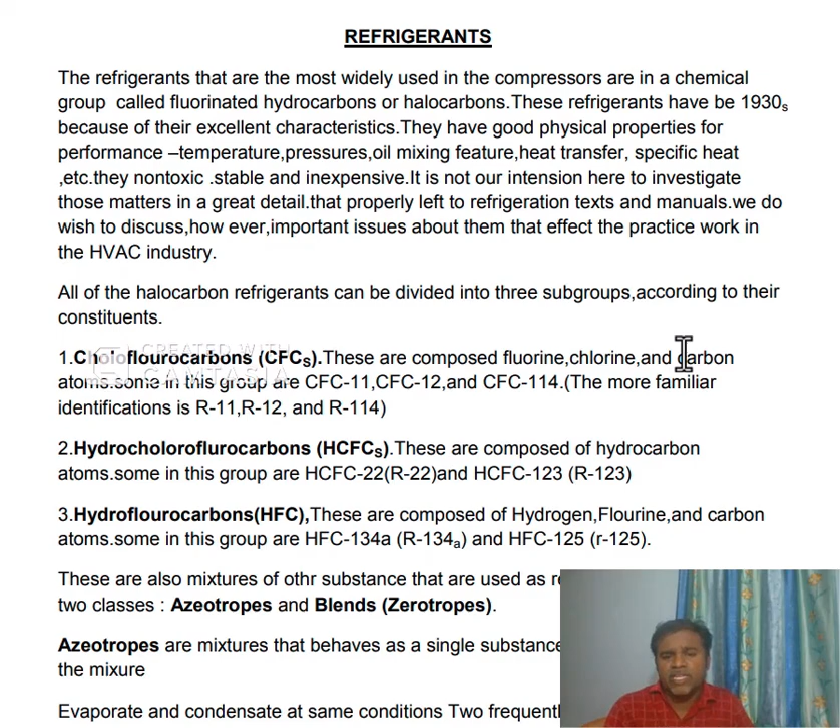R12 was previously used in the refrigeration industry, including mobility and the railway industry, but nowadays, due to its ozone depletion potential and the damage it causes to the ozone layer, it has been phased out and replaced with other refrigerants. I am going to explain in detail what has replaced R12. Coming to the next category,

hydrochlorofluorocarbons, these are HCFCs. These are composed of hydrogen atoms as well as chlorine, fluorine and carbon. In this category you can see HCFC 22, which is R22, and HCFC 123, which is R123.

Coming to the third category, HFCs, these are also composed of hydrogen, fluorine, and carbon atoms. In this one you can see HFC 134A, which can be represented as R134A, as well as HFC 125 or R125. R is nothing but the refrigerant name convention.

There are also other mixtures, which we can divide into two categories: azeotropes and blends, or zeotropes. The blends can also be renamed zeotropes. So what are azeotropes and blends?

Azeotropes are mixtures of refrigerants that behave as a single substance in all conditions. They try to mix as a single entity and behave as a single entity. For example, evaporation and condensation happen at the same conditions. In this category you can see R500, CFCs and HCFCs.

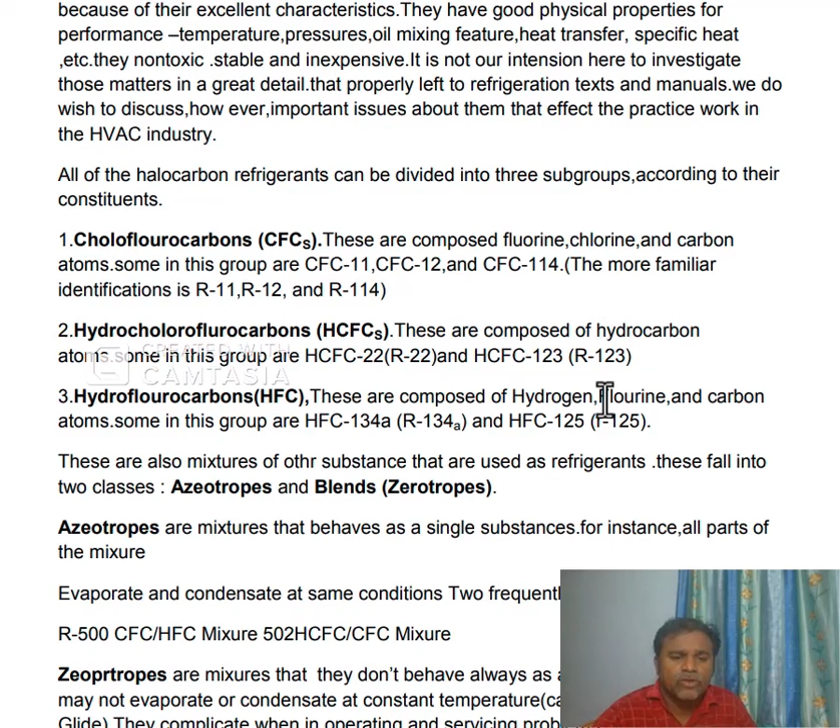Coming to zeotropes, these are mixtures that don't behave as a single substance. They may not evaporate or condense at a constant temperature, so their operating pressures and temperatures are a little complicated and related to some service problems. I think you understood about azeotropes and blends. Blends are nothing but zeotropes. Azeotropes behave as a single substance, and zeotropes behave as a different substance.

So coming to the properties of a good refrigerant. What are the properties needed for a good refrigerant to be selected, and put into an air conditioning machine, so that our efficiency will be good. Let me show you all the things, you can have a look.

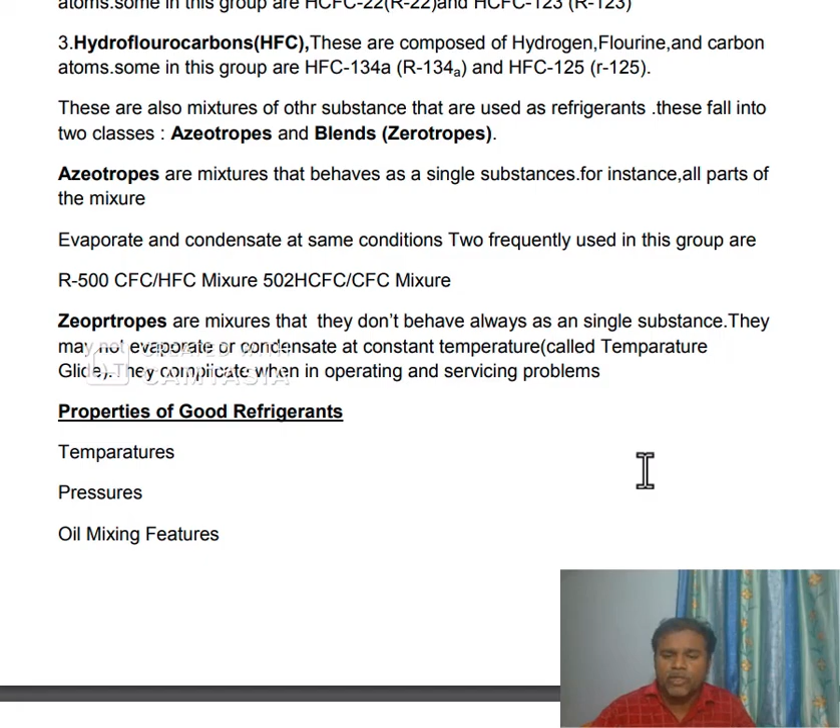Good properties of a refrigerant include temperature properties, pressure, and oil mixing - the mixing of gas and oil. It should behave as a single one, not separately, because due to high pressure and temperature, if the oil is separate, the mixing probabilities are not there. If they don't mix in a single manner, the gas pressure will rise separately and the oil will sit as a sludge, which is not a good sign for the refrigerant.

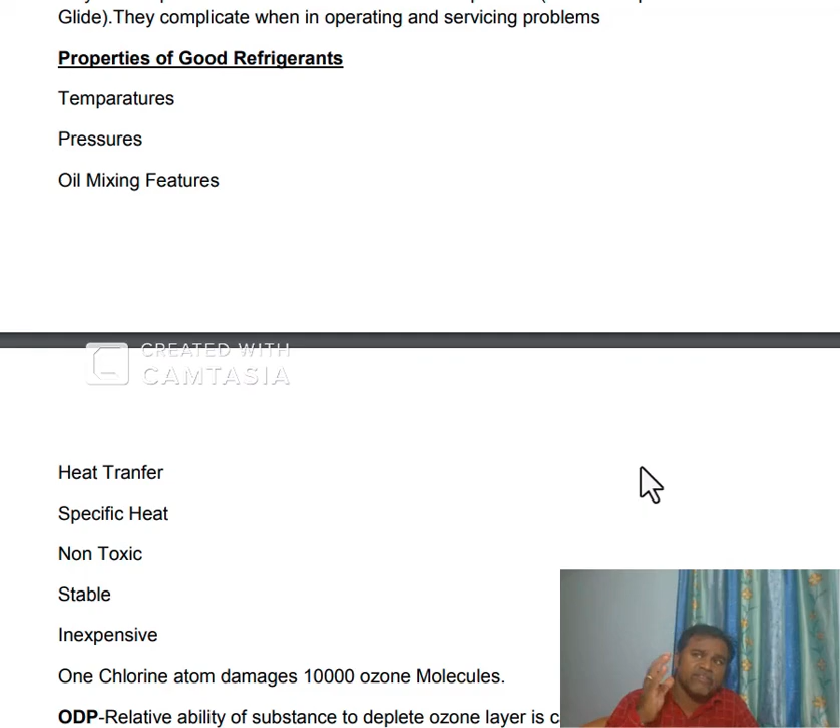Other properties include heat transfer possibility, specific heat, and it should be non-toxic, meaning it should not be poisonous whenever it is leaked inside a space where people are living. It should not damage the conditions. It should be stable and inexpensive, it should not cost much.

There is one point missing which I need to say, that is global warming potential, GWP. This is also one of the important properties a refrigerant should have. I will be coming to GWP further and explaining that. Generally, it should have a low global warming potential.

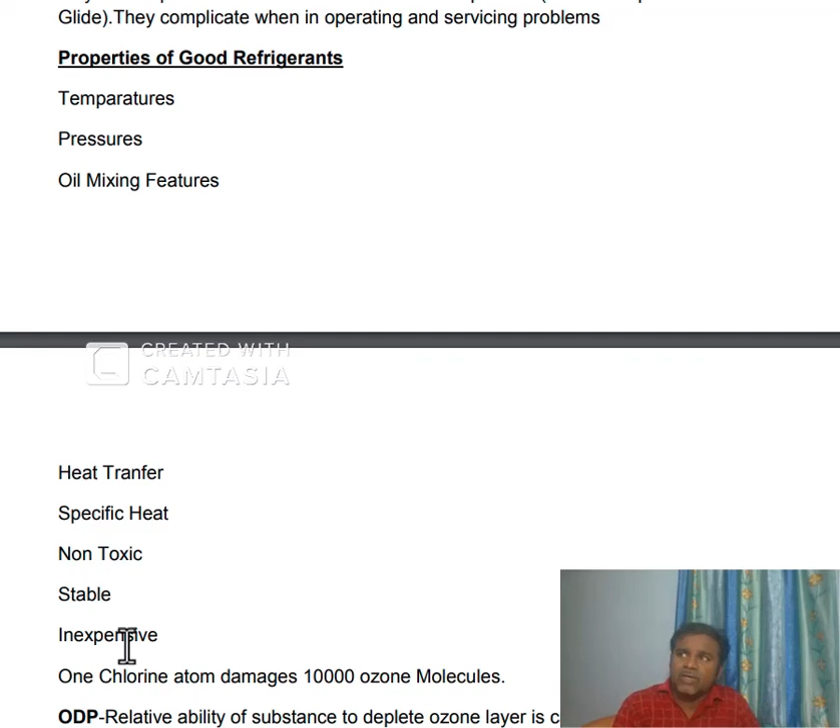Coming further, I want to explain how it basically damages the ozone layer. One chlorine atom is going to damage 10,000 ozone molecules - this is the potential damage factor a chlorine atom has. So scientists did a lot of research and found ways to phase out this chlorine atom, so some refrigerants came about by phasing out chlorine as an atom.

These were mainly developed to protect the ozone layer, which was already getting damaged. So there comes a concept called ozone depletion potential, ODP. Generally, if ozone depletion potential is 1, it is going to damage the ozone layer perfectly, because it consists of a chlorine atom. Coming to CFC 11, it's already 1, and CFC 12 is also having 1. That's why railway industry was earlier using CFC 12, which was phased out because of the norms, and now they are using R32 kind of refrigerants.

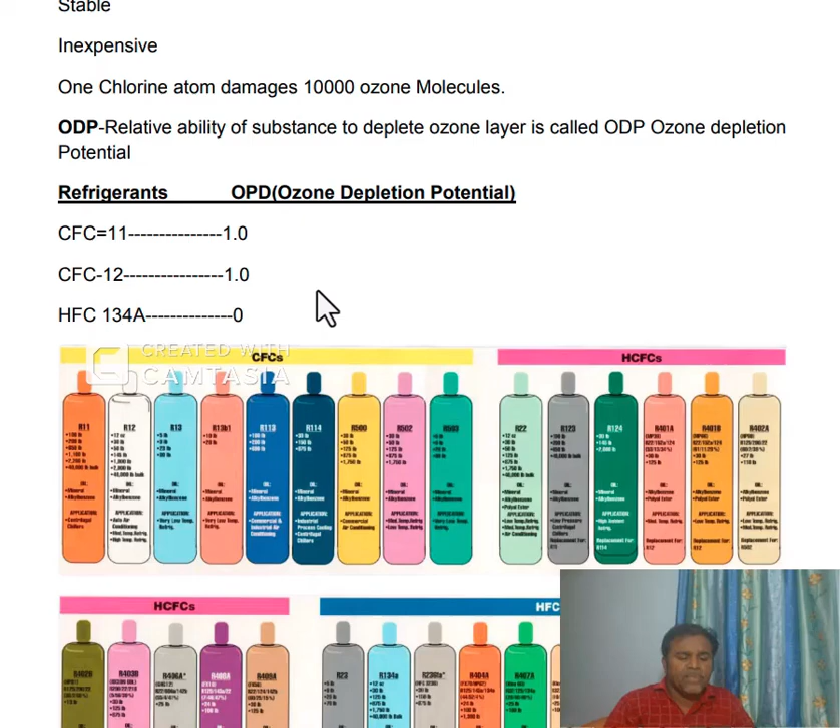So HFCs, you can see R134A is having 0. It represents a 0 ozone depletion potential, meaning it is not going to harm the environment or the ozone layer further.

These are the different representations of colors of the gases. Each color of gas has a different representation. You can see here R11, R12, R13, R13B1, R113, R114, R500 and R22 - so many gases are there. You can see these are the types of colors. CFCs are represented in this area - you can see what is present under CFCs and what is present under HCFCs. HCFCs are given here, and only HFCs are present here.

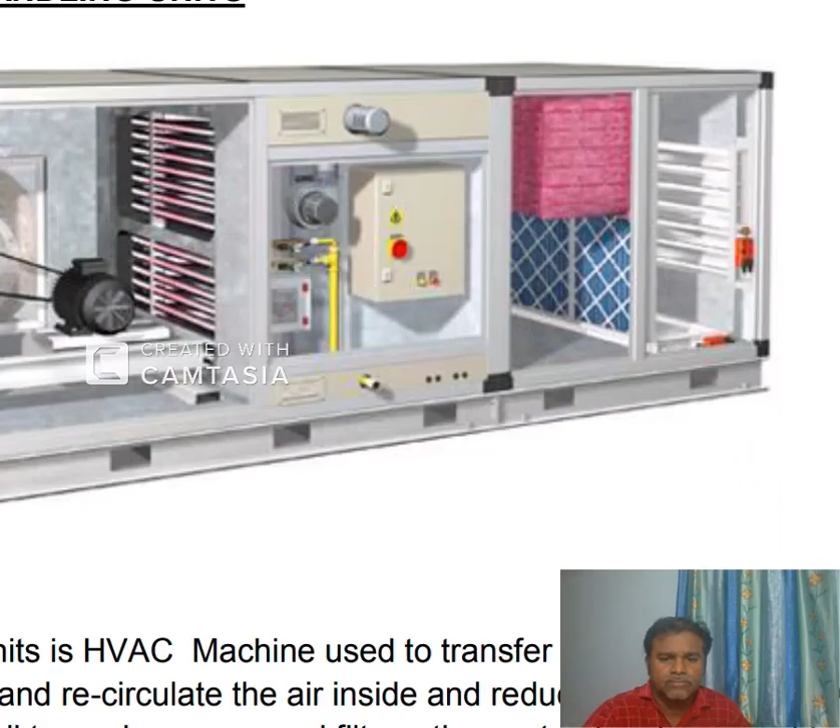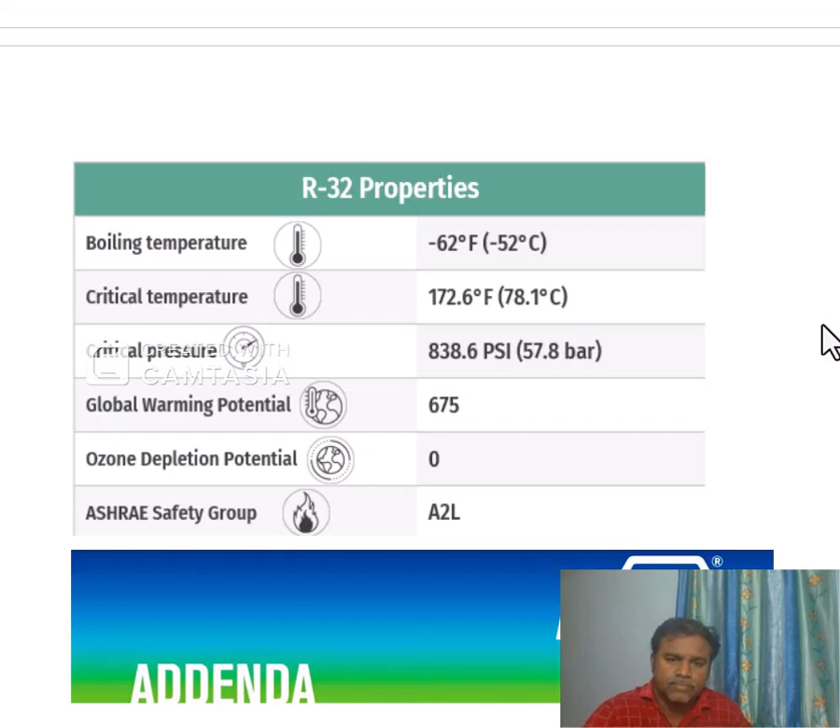Before that, I want to explain what global warming potential is. It is the index to measure how much thermal radiation the greenhouse gases would capture or absorb over a time frame. The capacity of the greenhouse gases to absorb heat - that is called global warming potential.

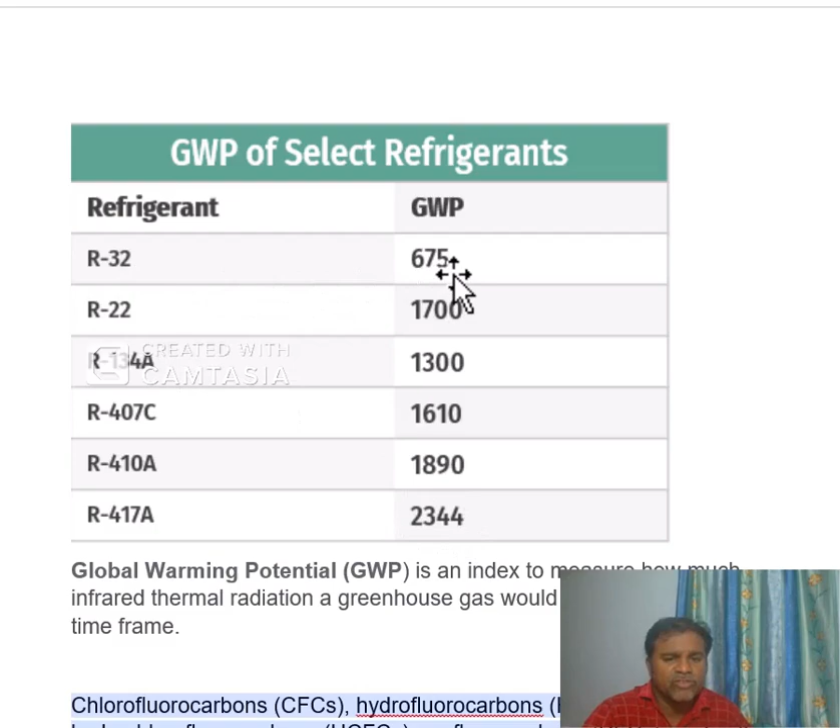Coming to refrigerants, R32 has a global warming potential of 675, R22 has 1700, R134A has 1300, R407 has 1610, R410 has 1890, and R417 has 2340. You can see R417A has a high global warming potential. This refrigerant is not suitable, as it is going to absorb most of the heat compared to R32, which has a lower global warming potential - you need to understand this.

Here you can see the chlorofluorocarbons (CFCs), hydrofluorocarbons (HFCs), hydrochlorofluorocarbons (HCFCs), as well as perfluorocarbons (PFCs), and sulfur hexafluoride (SF6). These are sometimes having high GWP gases, meaning for a given amount of mass, how much heat they are going to trap, more than CO2. So these are having high GWP values.

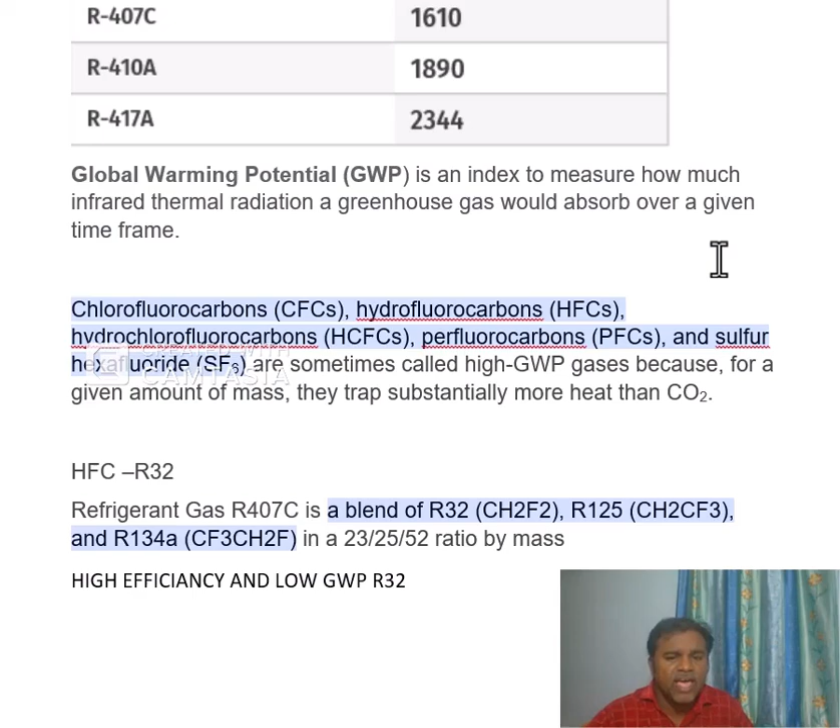Coming to HFC 32, it is a good refrigerant. As I said, it is having low GWP and it's also having high efficiency. High efficiency means it's having a high heat capturing rate from the indoor space, the absorption.

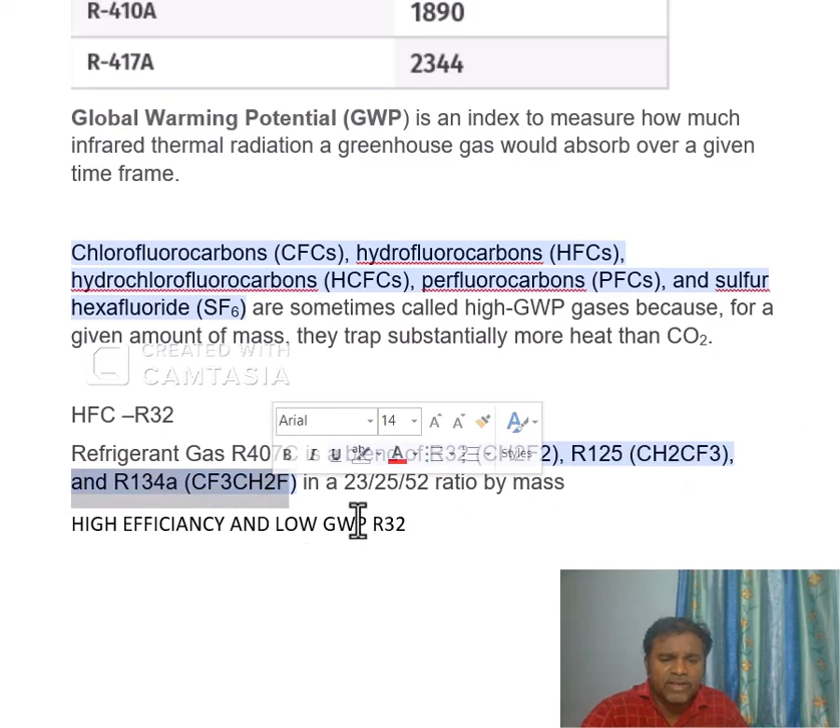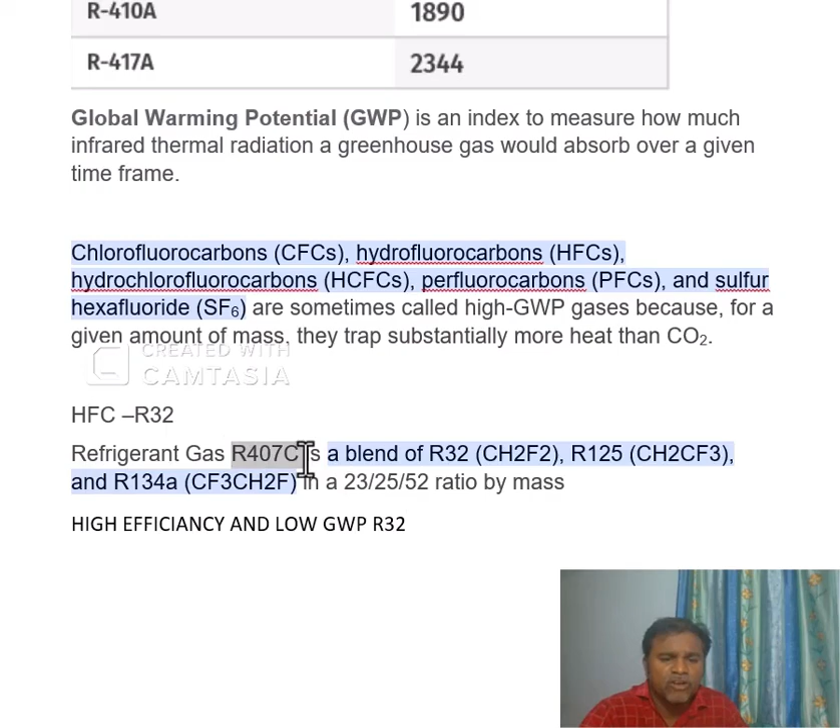Coming to the refrigerant R407C, it is a blend. It's a blend of R32, R125, and R134A refrigerants in the portions of 23%, 25%, and 52% respectively. So R32 is 23%, R125 is 25%, and R134A is 52%. This particular R407 is called a blend, so try to understand what blends are.

Generally R32, or not only R32, every refrigerant has these parameters: the boiling temperature, at what temperature this refrigerant is going to boil, critical temperature, critical pressure, global warming potential, and ozone depletion potential. Here ozone depletion potential is 0, and GWP is 675. Critical pressure and critical temperature are given already, along with the ASHRAE safety group.

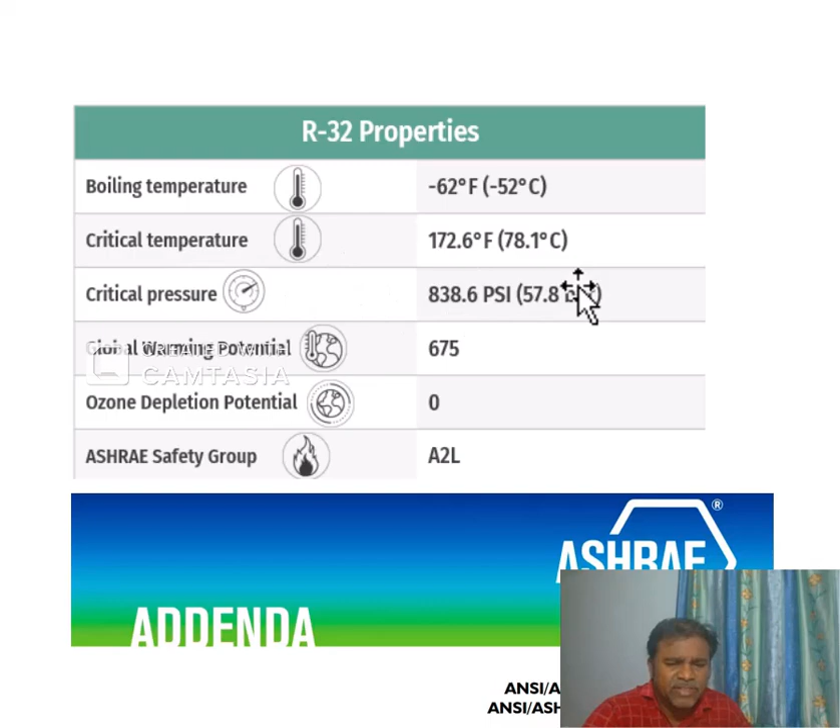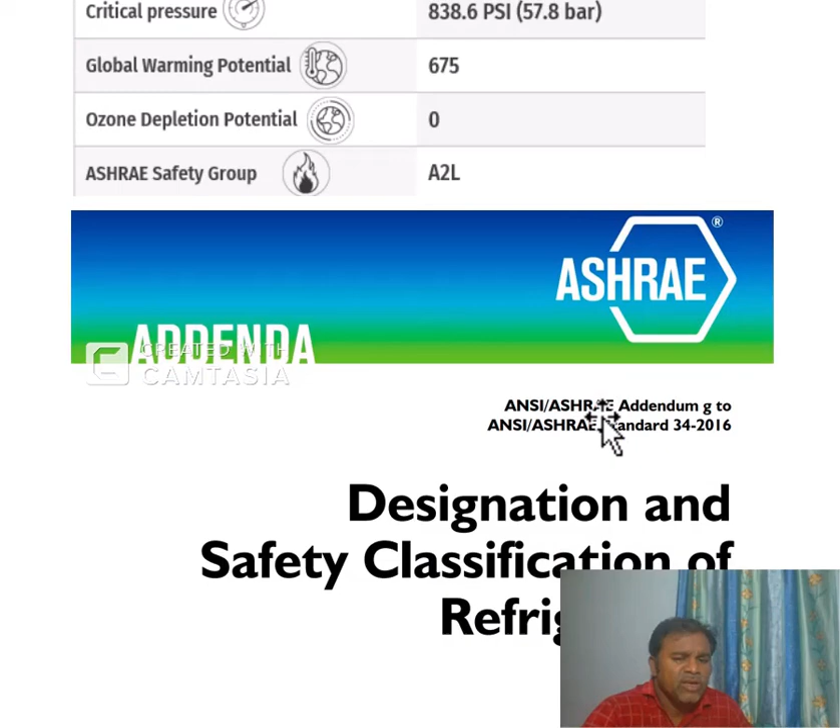So what is an ASHRAE safety group? The categories such as A2L represent the safety factor given to the refrigerant. According to ASHRAE standards, we need to refer to these documents, the designation and safety classification of refrigerants. Let me show you here.

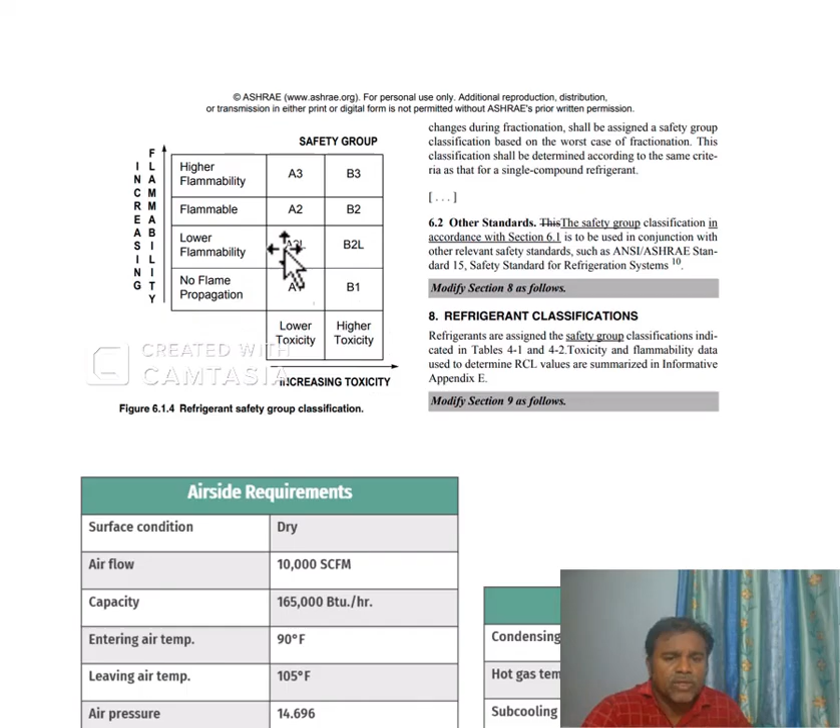Higher flammability safety groups A3, B3 are given. Again you can see here lower toxicity and higher toxicity categories. So our refrigerant, R32, falls in the category A2L, which is lower toxicity. This is how you need to take a close look at the safety group.

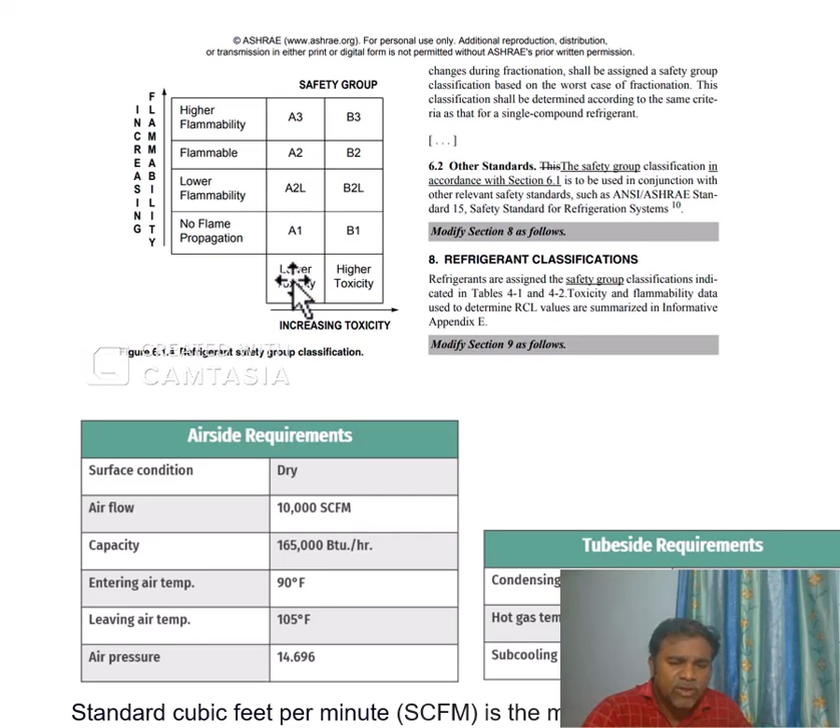So A2L means it is in lower toxicity. Suppose if it is in B2L, it will be having higher toxicity - that is the safety group. I already told you it is included in the A2L category. So please refer to the design and safety classification of refrigerants document from ASHRAE.

Sometimes you can see these properties are also required: the surface of the coil - dry, airflow and capacity, air temperature, leaving air temperature, air pressure, tube side temperature - that is condenser side, hot gas temperature, and subcooling in degrees. These are all technical parameters related to tubes.

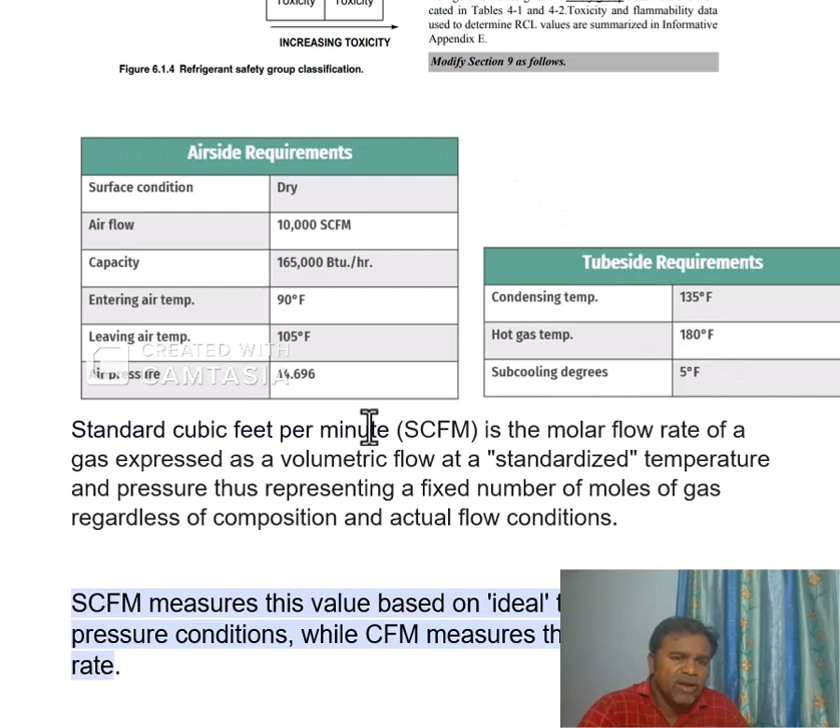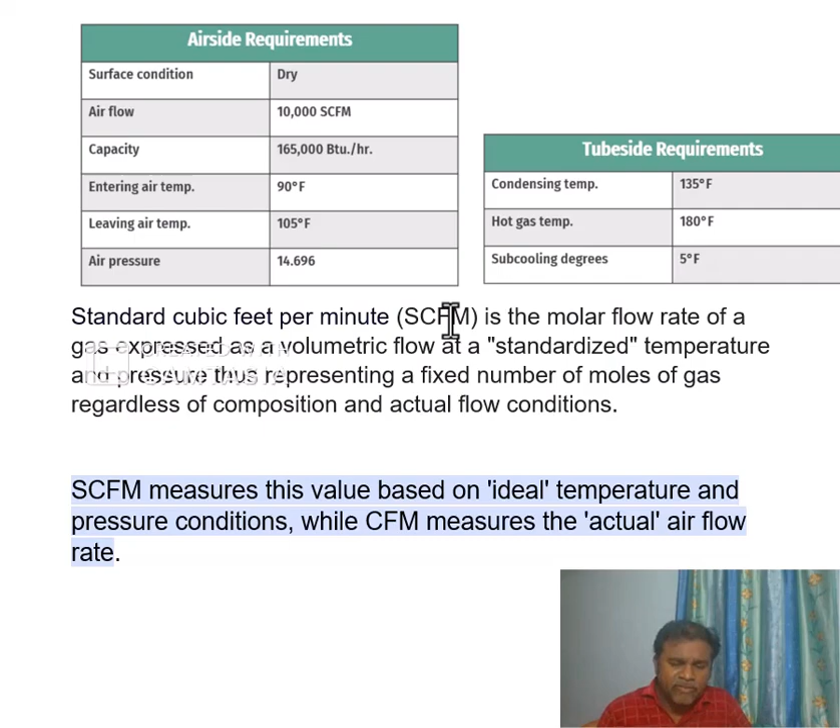Coming to SCFM, that is standard cubic feet per minute of air - the molar flow rate of the gas expressed at standard temperature and pressure. SCFM is based on ideal temperature and pressure, while CFM is the actual flow of air. Try to understand the difference between SCFM and CFM - this is very important, try to have a good understanding of these things.

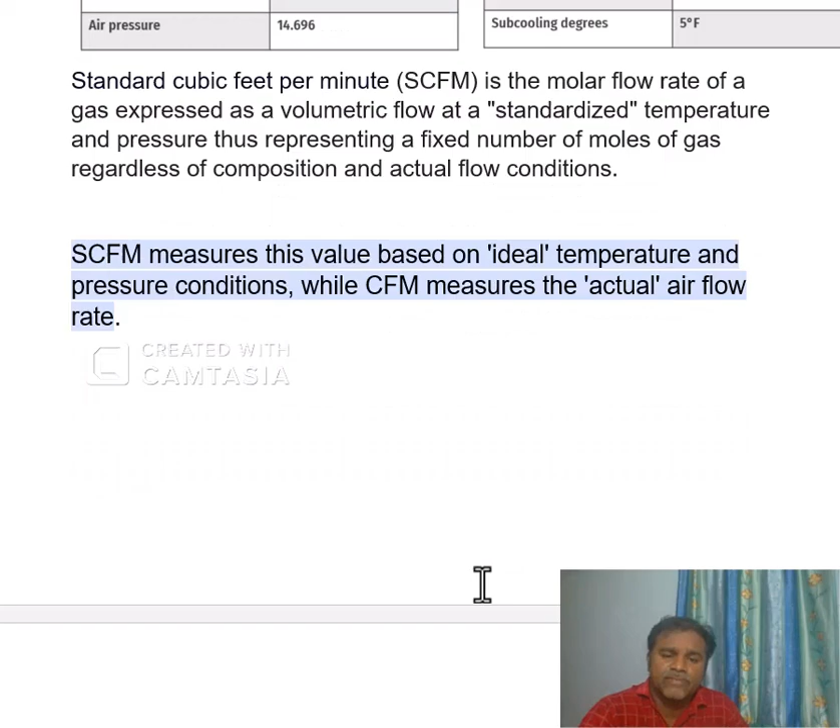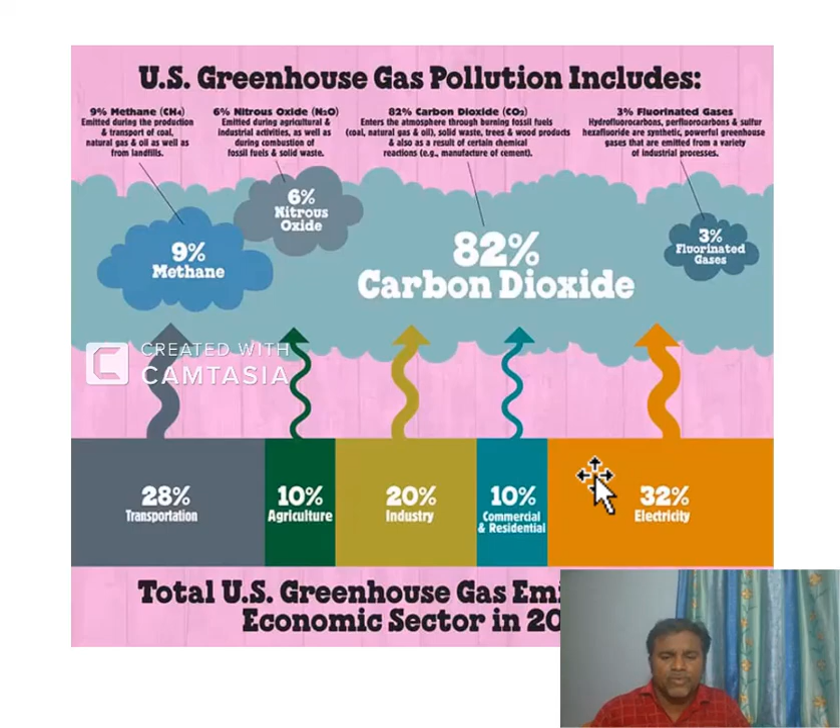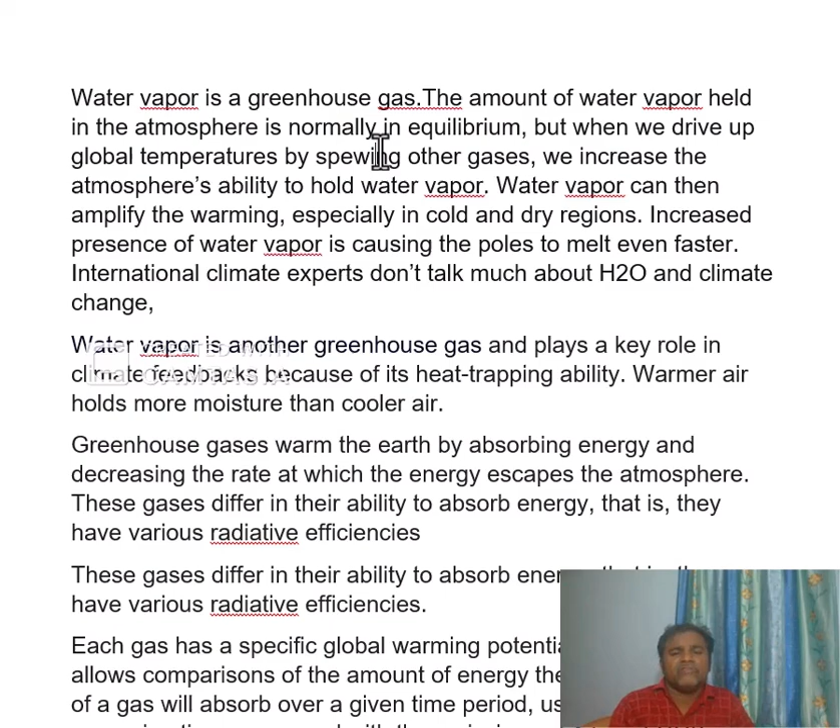Water vapor is also another greenhouse gas. How? If more water vapor is present in the air, it will have heat capturing capability, because it tries to increase the heat - more moisture present means more heating capability. So in this manner it is trying to hold heat as well as water. That's why you can say water vapor is also another greenhouse gas.